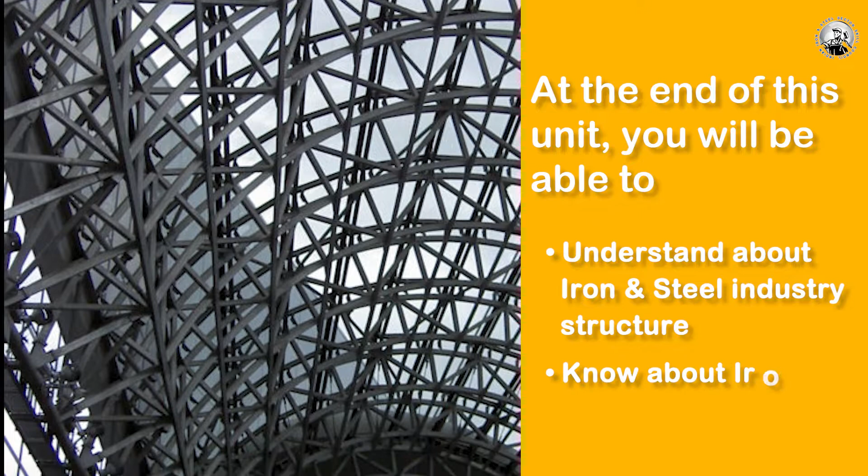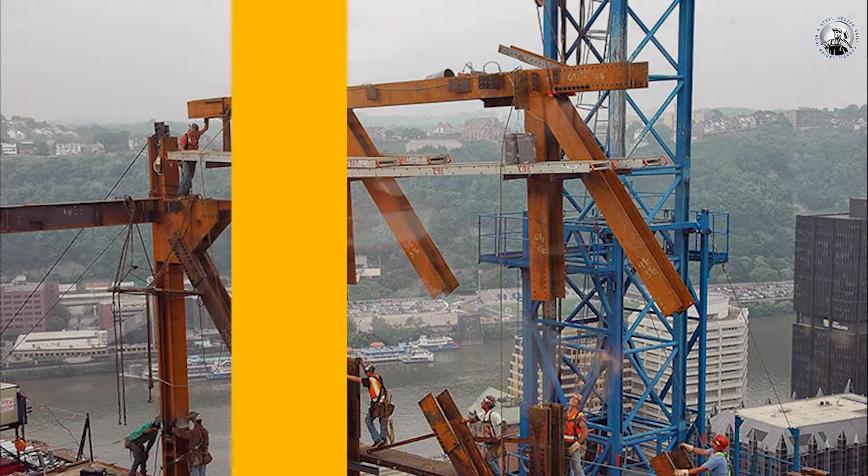The iron and steel industry in India is separated into two divisions: integrated producers and secondary producers. Integrated steel plants generally refer to plants that convert ore into iron, then to steel, and further on to other semi-finished or finished products.

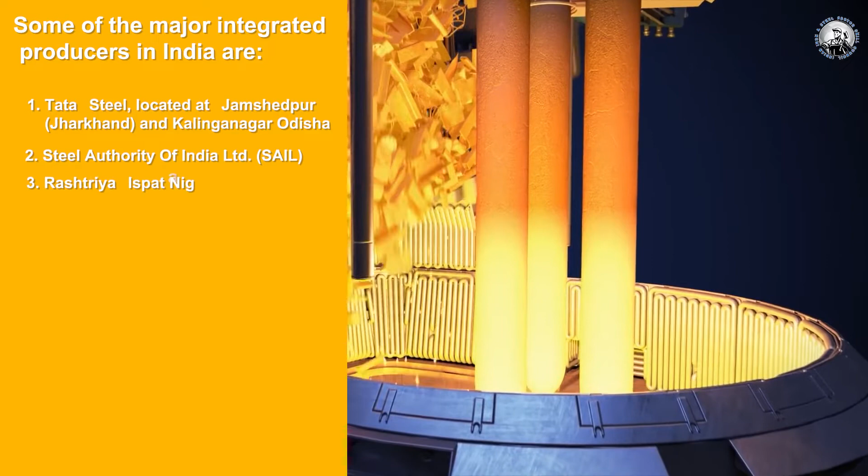Some of the major integrated producers in India are Tata Steel, located at Jamshedpur, Jharkhand, and Kalinganagar, Odisha; Steel Authority of India Limited; Rashtriya Ispat Nigam Limited or Vizag Steel at Andhra Pradesh; and JSW Steel Limited at Dolvi, Maharashtra, Karnataka and Tamil Nadu.

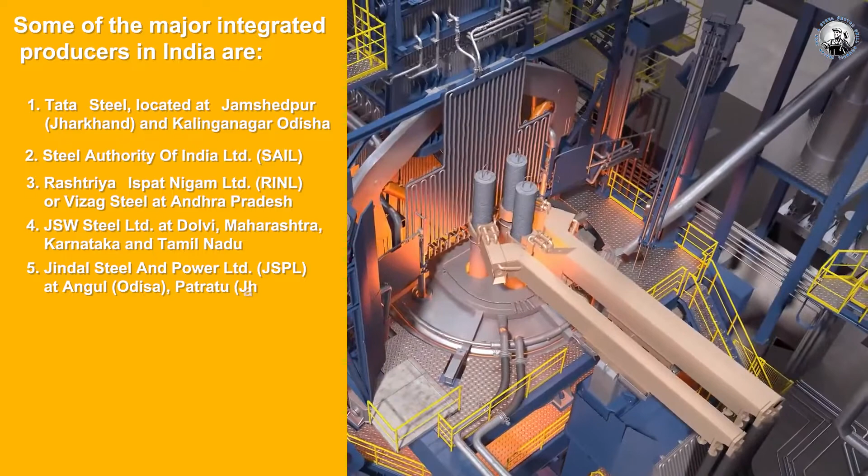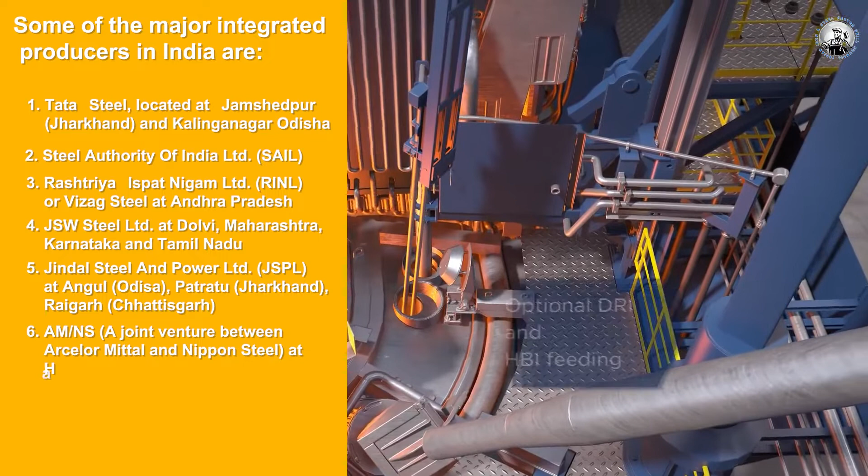Jindal Steel and Power Limited at Angul, Odisha, Patratu, Jharkhand, and Raigarh, Chhattisgarh. AMNS, a joint venture between ArcelorMittal and Nippon Steel, at Hazira, Gujarat. Electro Steel Limited at Bokaro, Jharkhand, under the Vedanta Group.

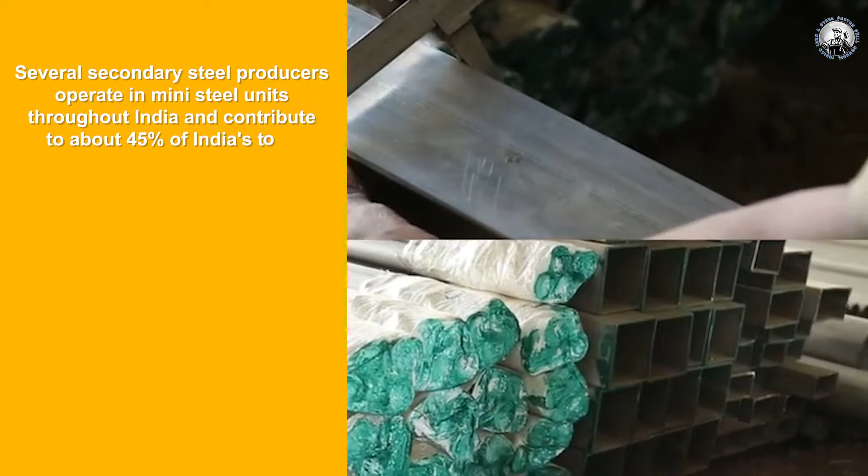The secondary steel sector comprises small steel plants which produce steel in electric furnaces using scrap and sponge iron. They produce both mild steel and alloy steel of given specifications. Several secondary steel producers operate in mini steel units throughout India and contribute to about 45% of India's total steel production. They are located strategically near iron ore and coal belts.

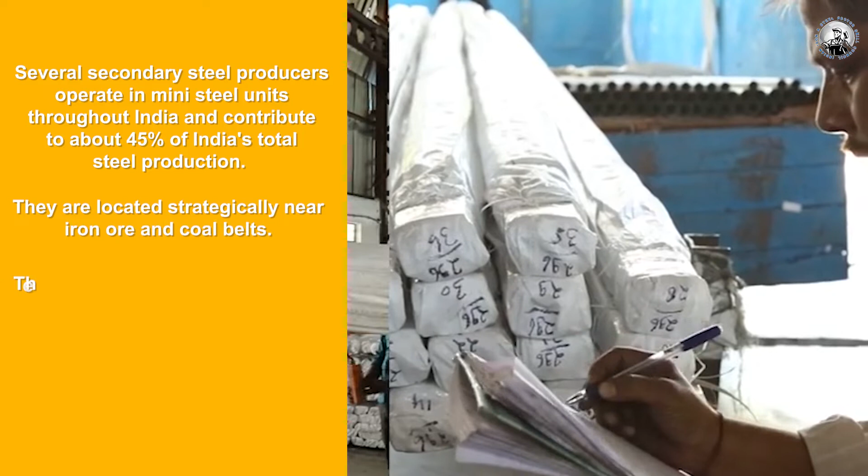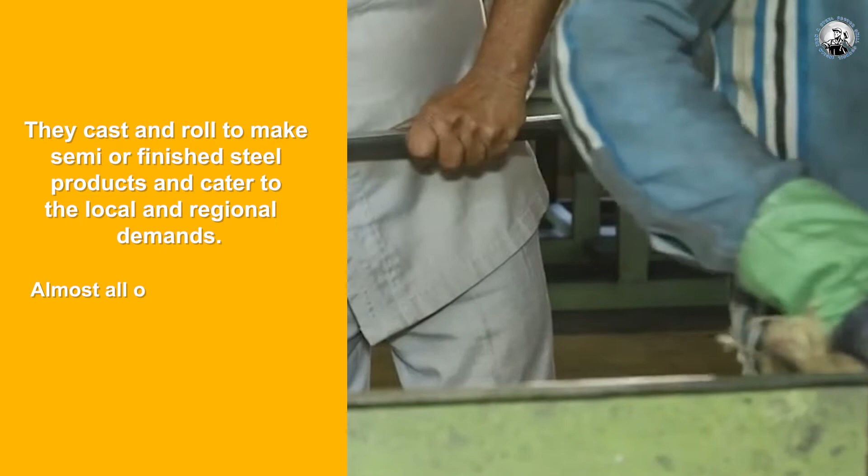They have a mini blast furnace and DRI sponge iron making facility, converting scrap and DRI into steel in an electric induction or arc furnace. They cast and roll to make semi or finished steel products and cater to local and regional demands. Almost all of them have less than 1 MTPA capacity.

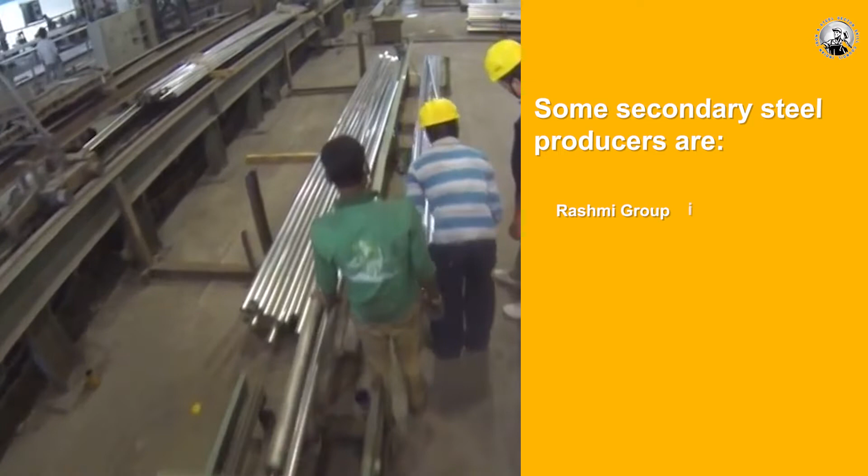Some of the secondary steel producers are Rashmi Group in West Bengal, Shyam Steel Industries in West Bengal, Jaiswal-Nicco Group in Raipur, and Atibir Industry in Jharkhand.

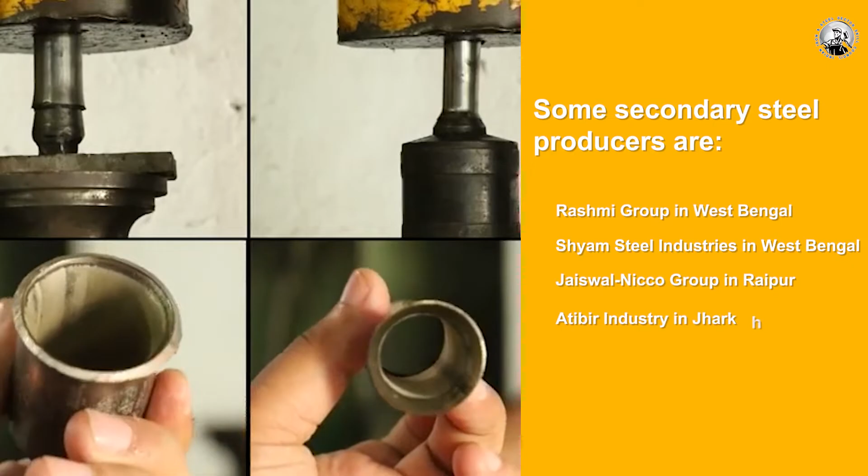Difference between integrated producers and secondary producers. Integrated steel plants - type of producer: primary producer involving iron making, steel making, casting, roughing, rolling, billet rolling and product rolling.

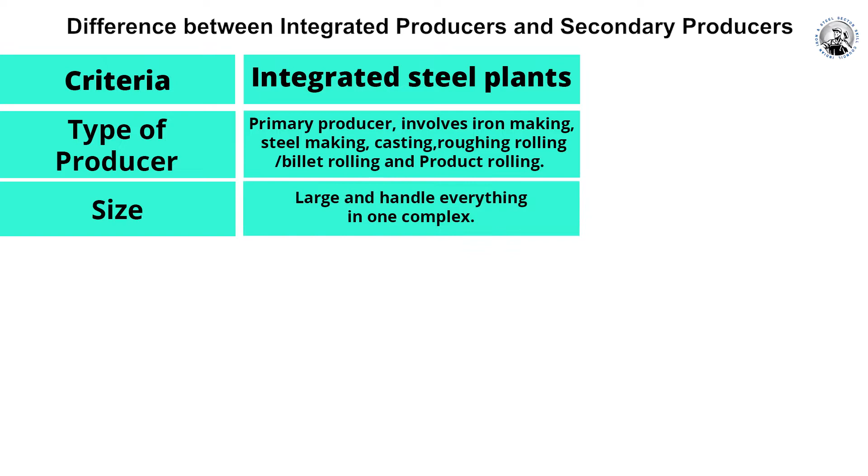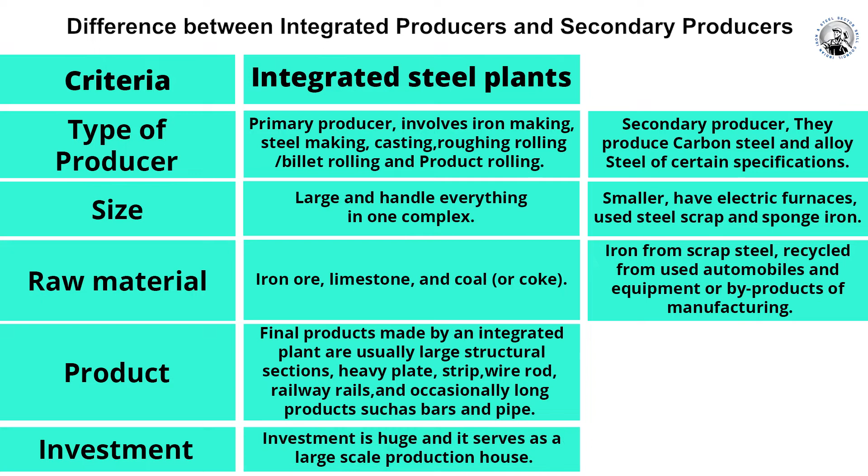Size: large, and handle everything in one complex. Raw material: iron ore, limestone and coal or coke. Product: final products made by an integrated plant are usually large structural sections, heavy plates, strips, wire rod, railway rails, and occasionally long products such as bars and pipes. Investment: investment is huge, serving as a large-scale production house.

Mini steel plants - type of producer: secondary producer. They produce carbon steel and alloy steel of certain specifications. Size: smaller, have electric furnace, use steel scrap and sponge iron. Raw material: iron from scrap steel recycled from used automobiles and equipment, or byproduct of manufacturing.

Product: they specialize, for example, in making coils of rod for wire drawing or pipe, or in special sections for transportation and agriculture. Investment: incorporated with lower investment.

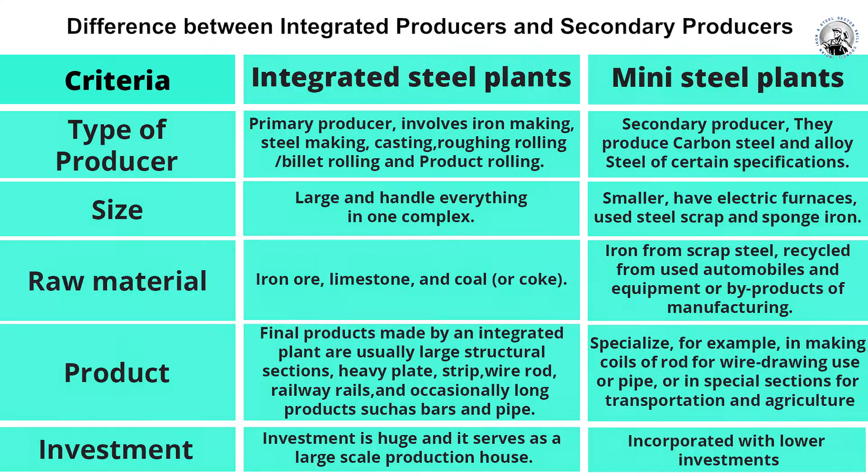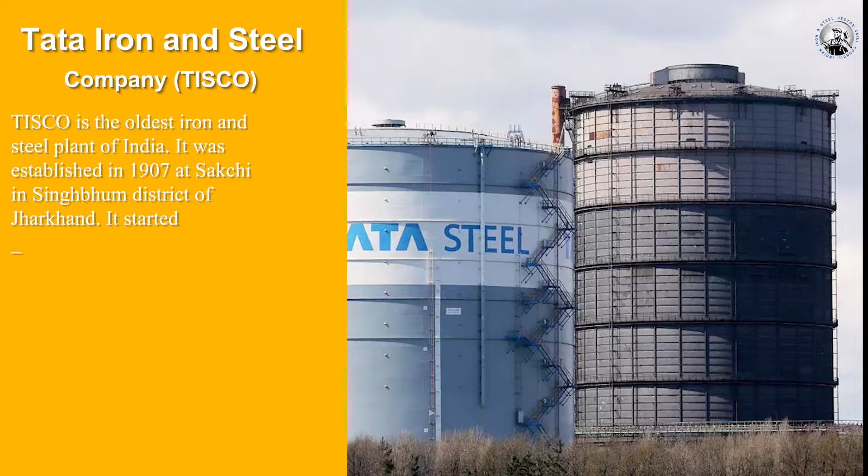Some of the major iron and steel plants of India are Tata Iron and Steel Company, TISCO. TISCO is the oldest iron and steel plant in India. It was established in 1907 at Sakchi in Singhbhum district of Jharkhand. It started producing pig iron in 1911 and steel in 1912.

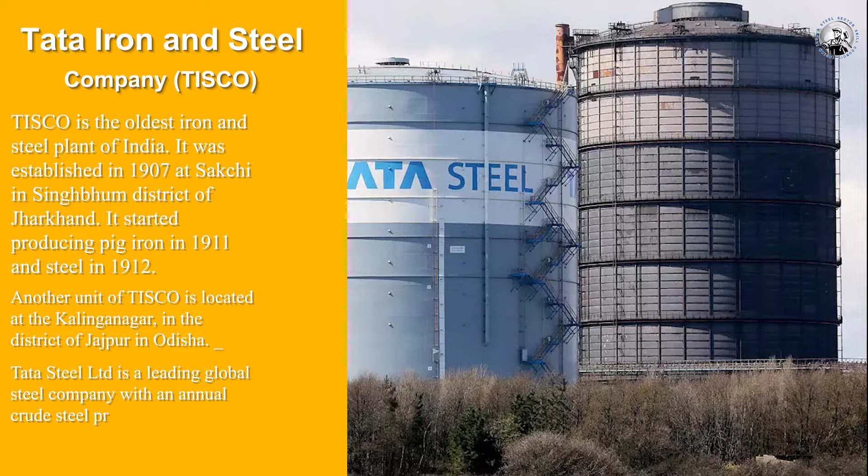Another unit of TISCO is located at Kalinganagar in the district Jajpur in Odisha. Tata Steel Limited is a leading global steel company with an annual production capacity of 19.6 MTPA.

Steel Authority of India Limited. After independence, three integrated steel plants - BSP, DSP, RSP - were set up by the Government of India, each of 1 MTPA capacity, under the supervision of Hindustan Steel Limited, HSL.

In January 1973, a holding company named SAIL was incorporated and took over these three plants and the Bokaro steel plant. Indian Iron and Steel Company, IISCO, was then renamed as IISCO Steel Plant, ISP. IISCO Burnpur is one of the oldest private steelmakers in India before independence.

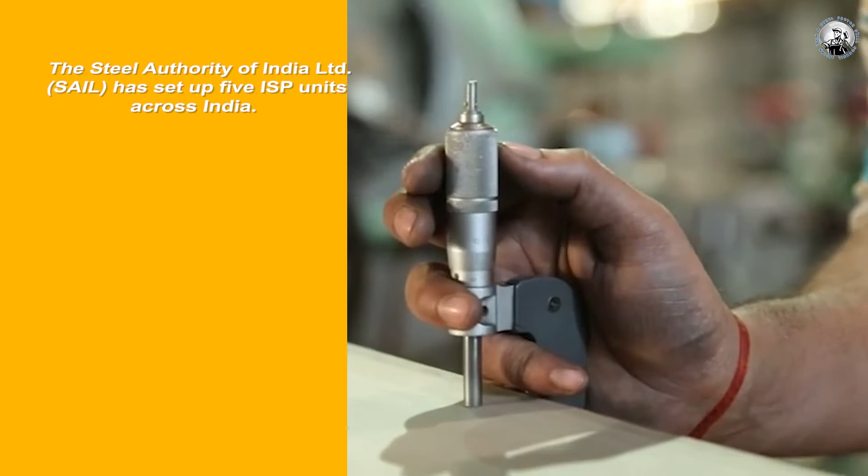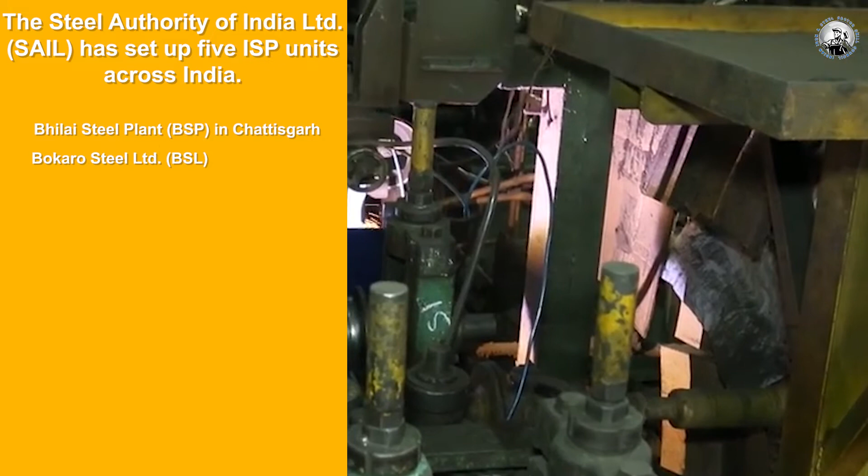The Steel Authority of India Limited, SAIL, has set up five ISP units across India: Bhilai Steel Plant, BSP, in Chhattisgarh; Bokaro Steel Limited, BSL, in Jharkhand; Durgapur Steel Plant, DSP, in West Bengal; Rourkela Steel Plant, RSP, in Odisha; and IISCO Steel Plant, ISP, in Burnpur, West Bengal.

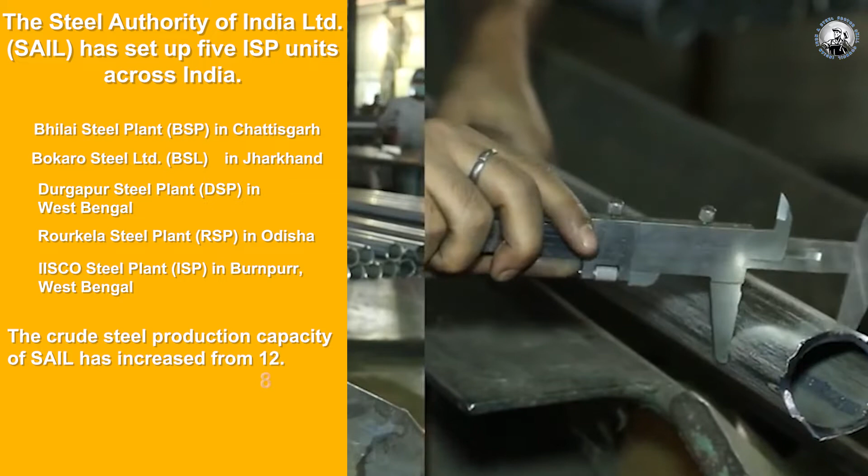The crude steel production capacity of SAIL has increased from 12.8 MTPA to 21.4 MTPA post modernization and expansion of all the plants.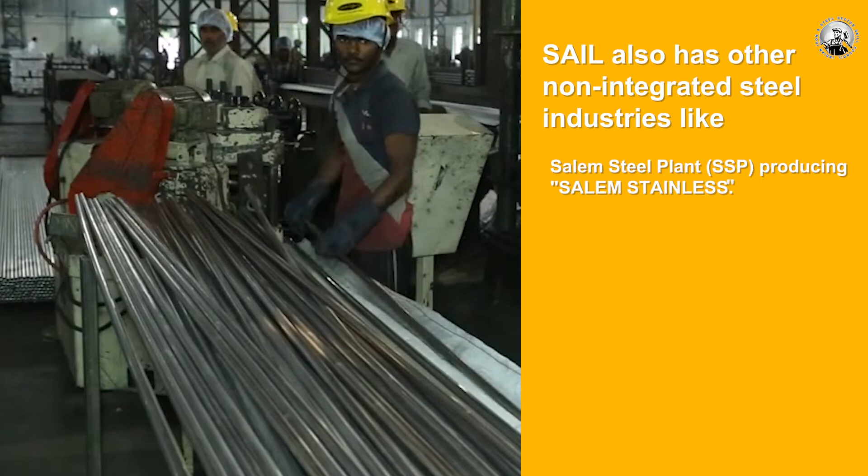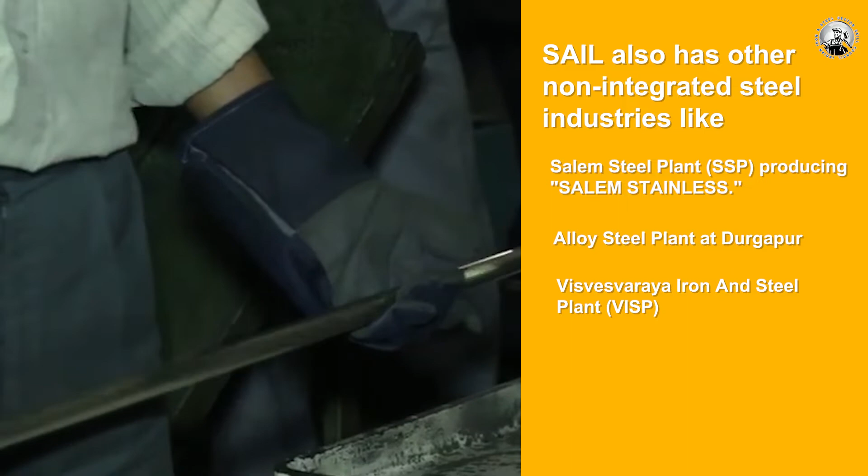SAIL also has other non-integrated steel industries like Salem Steel Plant (SSP) producing Salem Stainless, Alloy Steel Plant at Durgapur, Visvesvaraya Iron and Steel Plant (VISP), Maharashtra Elektrosmelt Limited (MEL), and Bhilai Steel Plant.

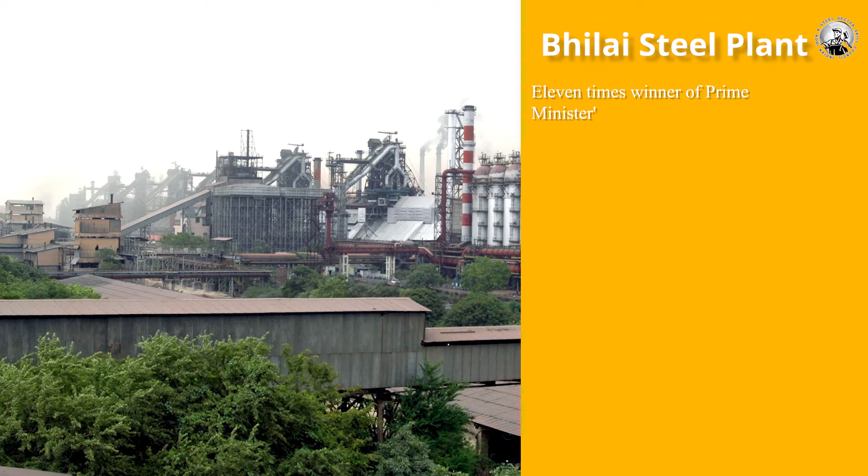An 11-time winner of the Prime Minister's Trophy for Best Integrated Steel Plant in the country, Bhilai Steel Plant is India's sole producer and supplier of world-class rails for Indian Railway, and a major producer of a wide variety of heavy steel plates and structural steel.

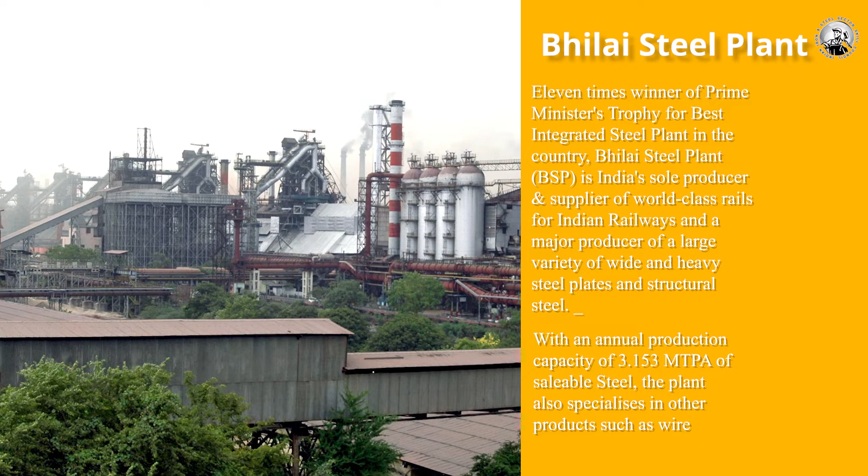With an annual production capacity of 3.153 MTPA of saleable steel, the plant also specializes in other products such as wire rods and merchant products.

Bokaro Steel Plant is the 4th integrated plant in India, built in collaboration with the Soviet Union. It is considered the country's first Swadeshi steel plant, built with maximum indigenous content in terms of equipment, material and know-how.

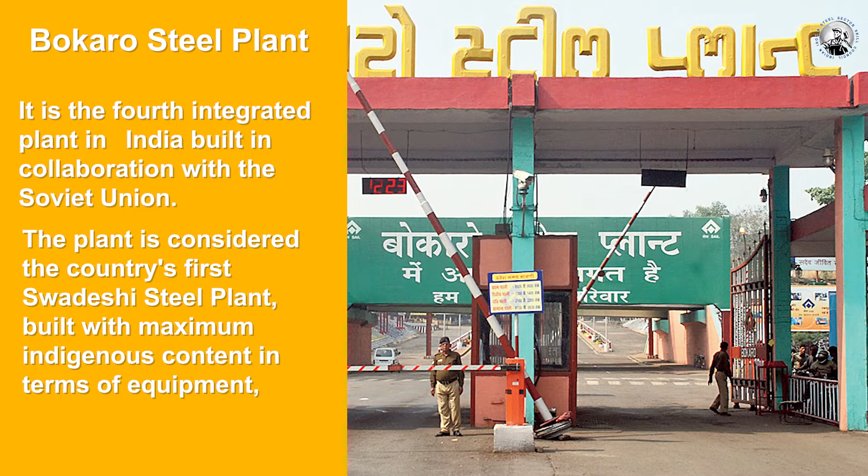Durgapur Steel Plant, set up in the late 50s, is a leading producer of long products and the only producer of forged railway wheels and axles in the country.

The plant started production with an initial crude steel capacity of 1 MTPA in 1959, which has now reached up to 2.20 MTPA.

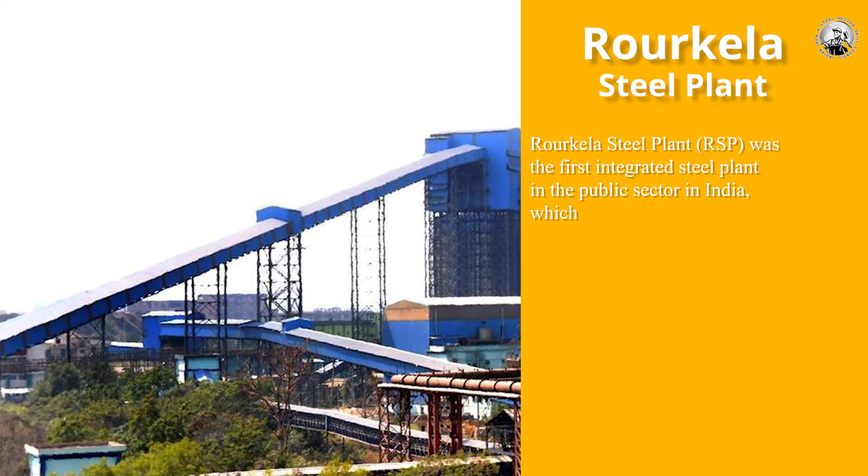Rourkela Steel Plant was the first integrated steel plant in the public sector in India, set up with German collaboration with an installed capacity of 1 million tons.

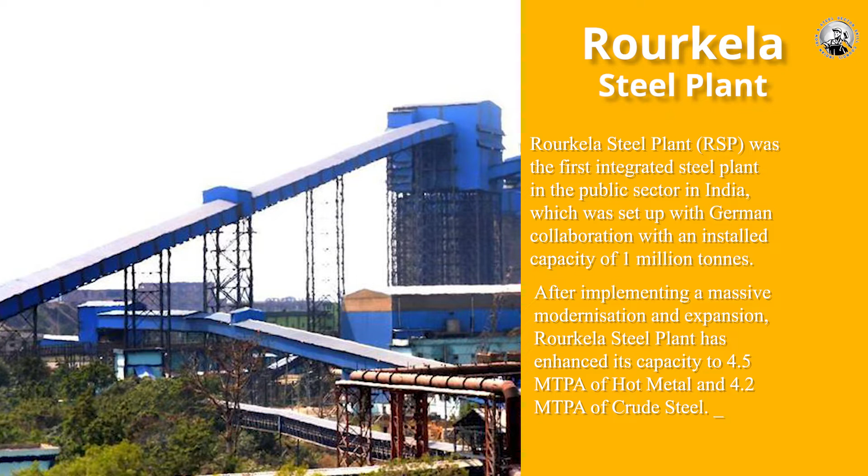After implementing a massive modernization and expansion, Rourkela Steel Plant has enhanced its capacity to 4.5 MTPA of hot metal and 4.2 MTPA of crude steel.

Indian Iron and Steel Company (IISCO), a SAIL subsidiary, was merged with SAIL on 16th February 2006.

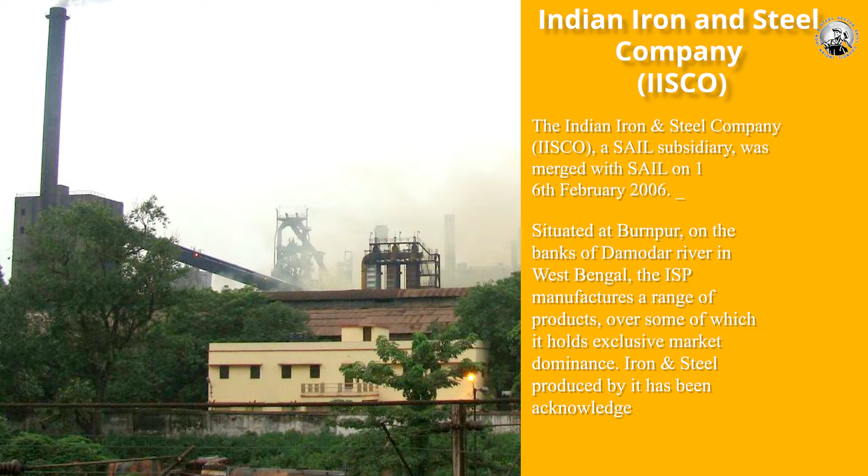Situated at Burnpur on the banks of the Damodar River in West Bengal, ISP manufactures a range of products, some of which it holds exclusive market dominance over. Iron and steel products made by it have been acknowledged as being of the finest quality.

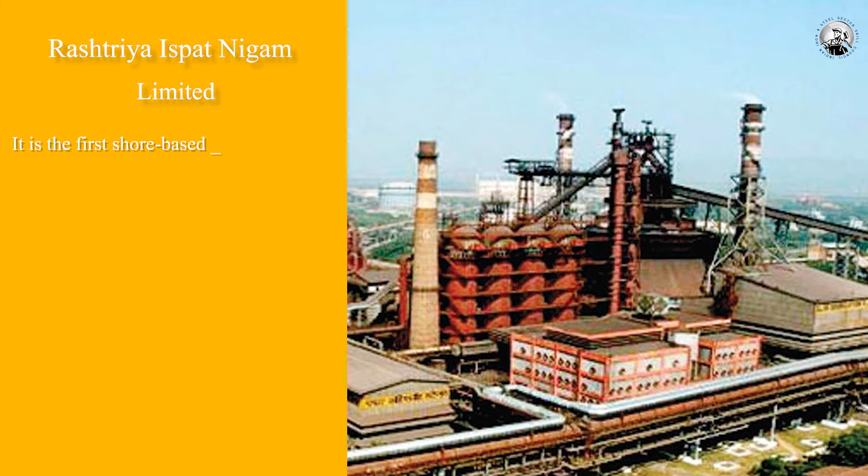Rashtriya Ispat Nigam Limited is the first shore-based integrated iron and steel plant owned by the Government of India, located at Visakhapatnam, Andhra Pradesh.

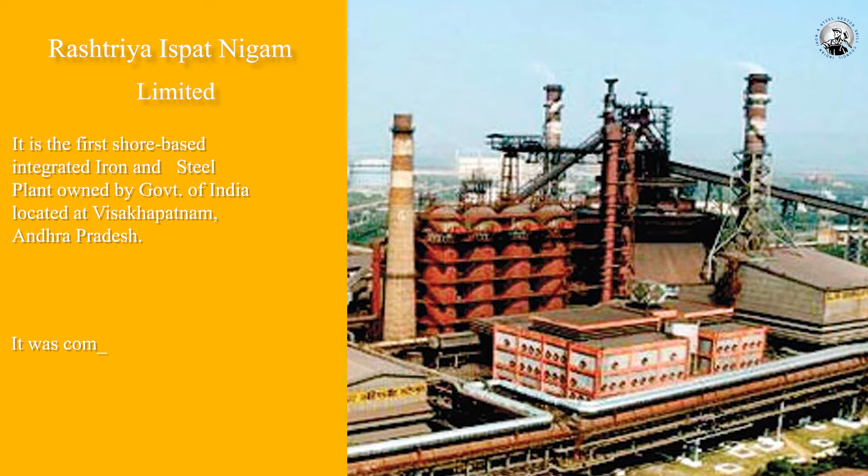It was commissioned in 1982 as a 3 MTPA plant for value-added steel, which now operates at 7.3 MTPA capacity.

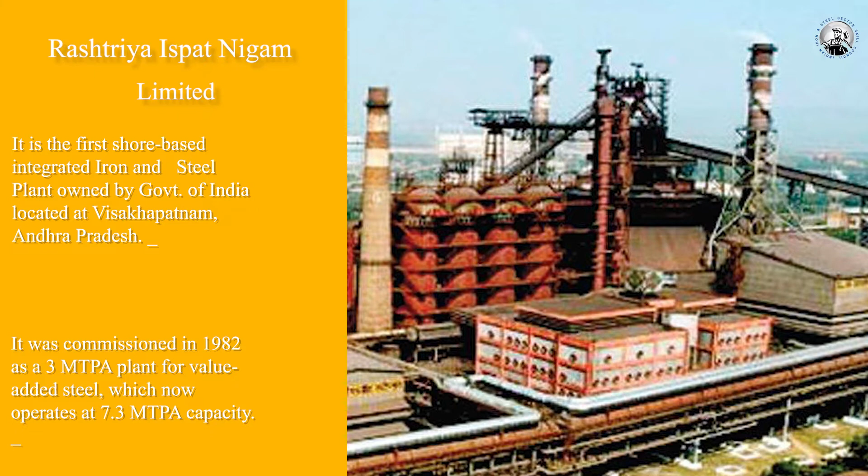JSW Steel Limited is one of the leading private sector plants, based in multiple locations like Dolvi in Maharashtra, Karnataka and Tamil Nadu, having 18 MTPA installed capacity.

It caters to the needs of South India, operating from 6 locations across the country.

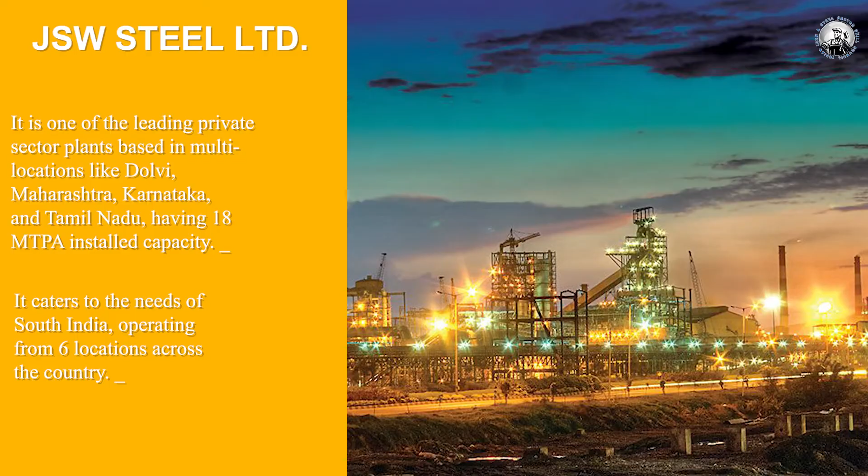Jindal Steel and Power Limited (JSPL), one of the most modern steel-making plants, located at Angul in Odisha, Patratu in Jharkhand and Raigarh in Chhattisgarh, with an installed capacity of 8.6 MTPA, has a wide range of products and is focusing on the market in North and East India.

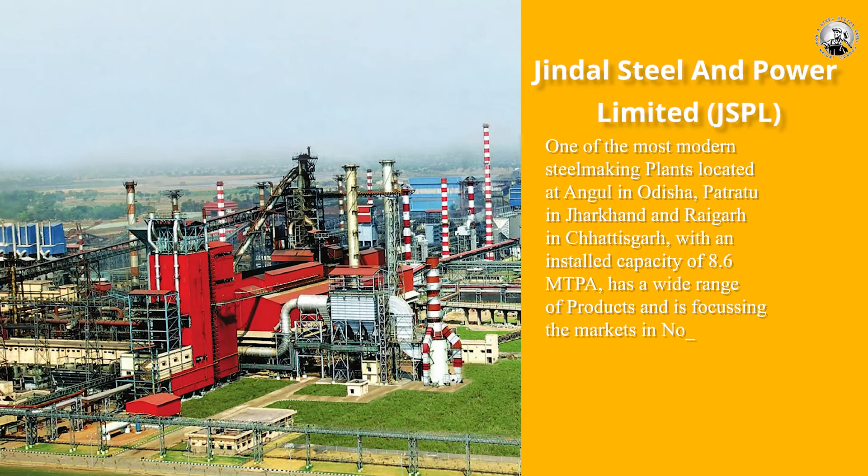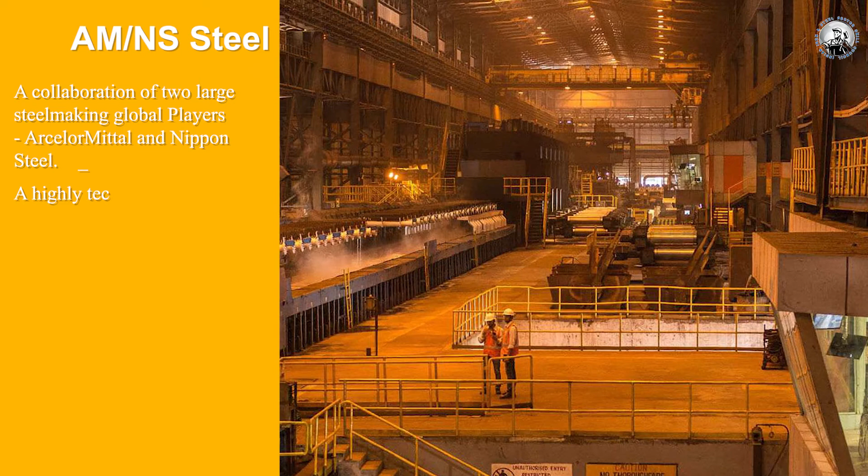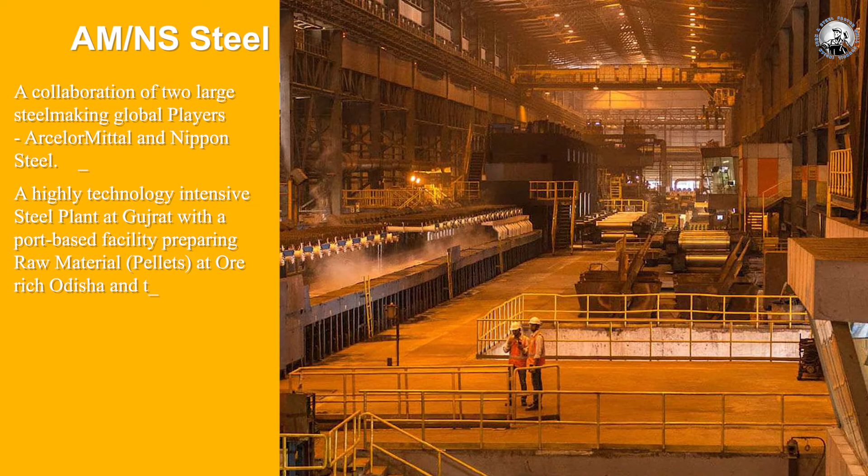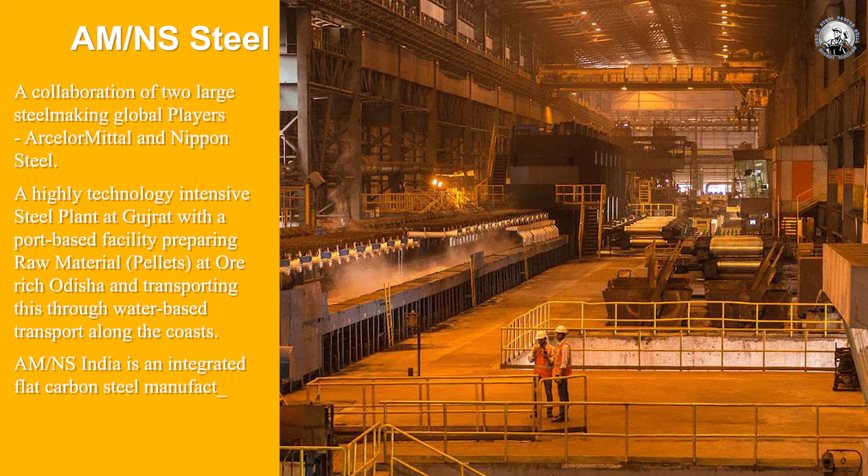AMNS Steel, a collaboration of 2 large steel-making global players, ArcelorMittal and Nippon Steel, is a highly technologically intensive steel plant at Gujarat with a port-based facility preparing raw material at ore-rich Odisha and transporting it through water-based transport along the coast. AMNS India is an integrated flat carbon steel manufacturer with an achievable crude steel capacity of 9 MTPA.

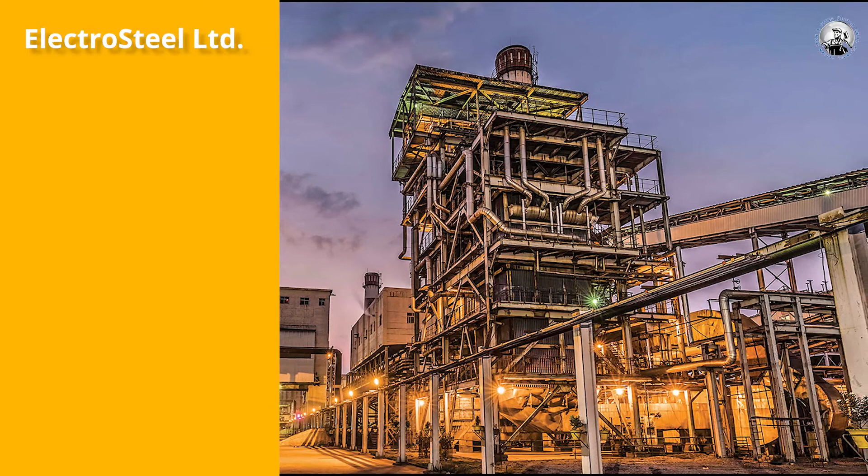Electrosteel Limited, an integrated iron and steel plant being commissioned at Bokaro under the Vedanta Group, has the latest state-of-the-art technology to produce long steel products and ductile iron pipes.

It has a 2.2 MTPA capacity for phase 1 and 5 MTPA capacity for phase 2, producing pig iron, billets, TMT bars, wire rods and ductile iron pipes.

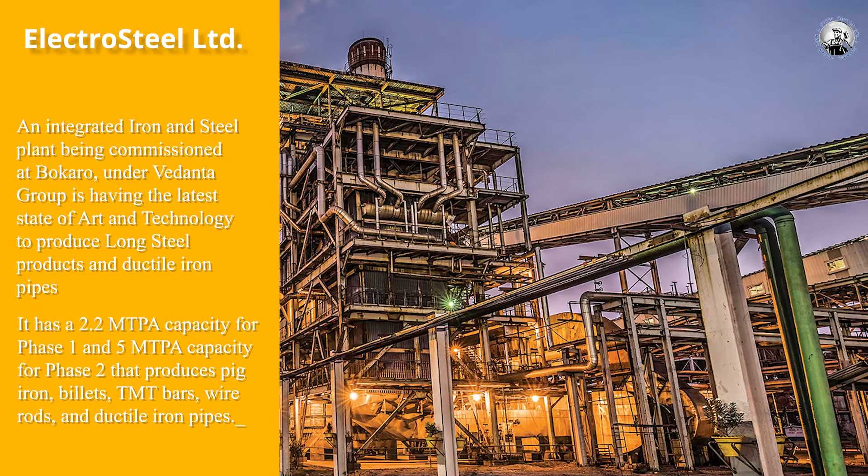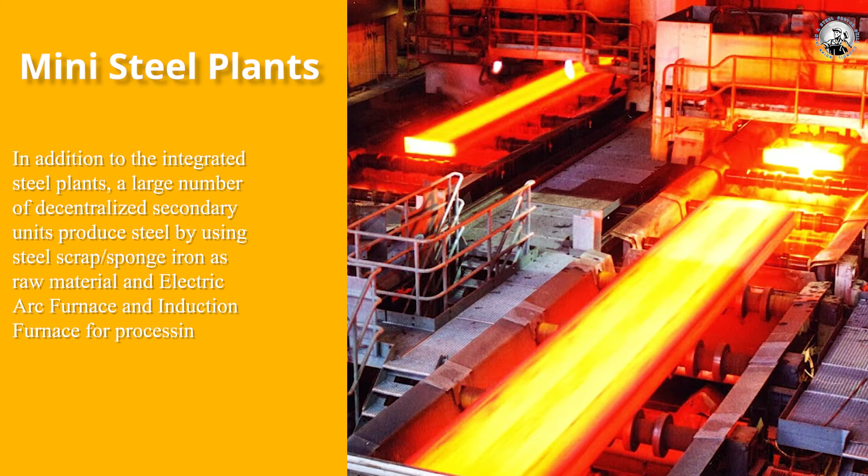Mini steel plants: in addition to the integrated steel plants, many decentralized secondary units produce steel using steel scrap and sponge iron as raw material, with electric arc furnaces and induction furnaces for processing. It is easy to construct such plants and their gestation period is short.